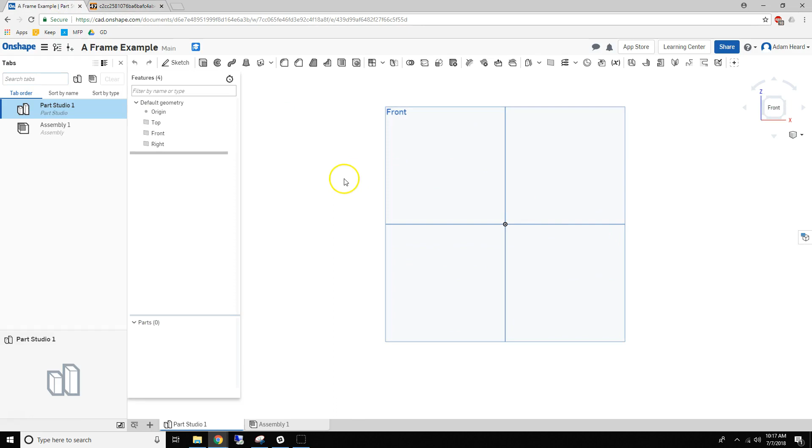973 is switching to Onshape, and I haven't done it all that much yet, so I'm going to be a little slow. But let's get started.

So I'm going to draw the side rails, edge on. Oh, and I should have made those construction geometry. There's no collinear mate, so you got to do coincident here, which is kind of a bummer. Draw that.

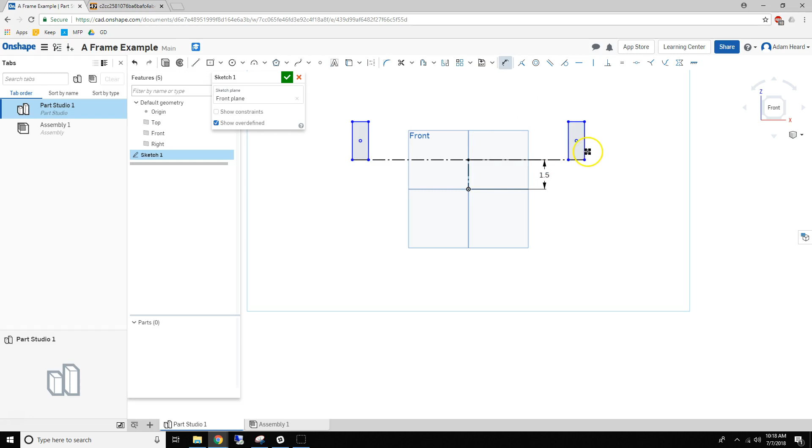Make that vertical. I think we had about 1.5 inches ground clearance. That's accurate enough for now. This was 32.5. These guys were 1 inch by 2 inch, and make that all construction geometry.

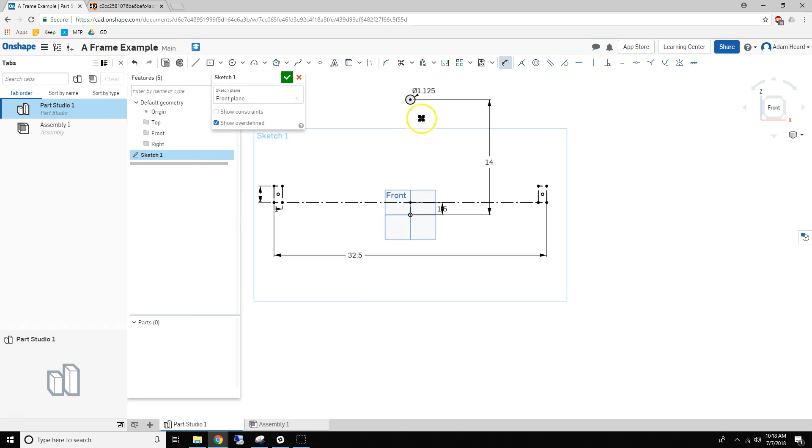Alright, so we're going to want a centered bearing hole for an FR8 bearing. Make that vertical, and we'll do that, I don't know, 14 inches off the ground for now or something. That's a number that we would come back in and iterate if we were trying to size what the arm's going to be. I've got no idea what that'll be right now.

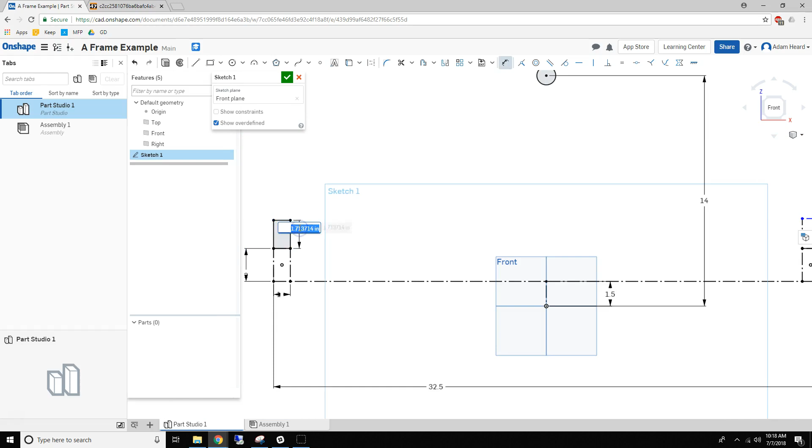So these are both going to be vertical pieces of 2 by 1. I guess I don't need to draw the one over here. To give us some holes to then attach to an angled piece of 2 by 1 to make the A-frame, and you'll see that coming up.

Alright, so as far as I can tell, Onshape doesn't have an angled rectangle tool, so you got to draw those manually, which is kind of a bummer. But with hotkeys and stuff, it's not too bad. Oh, there's no perpendicular hotkey.

I guess we can go equal, equal, equal, equal. Then we just got to do one perpendicular. Cool. And this is 2 inches. I guess we could have made it equal to this tube here because they're both 2 by 1.

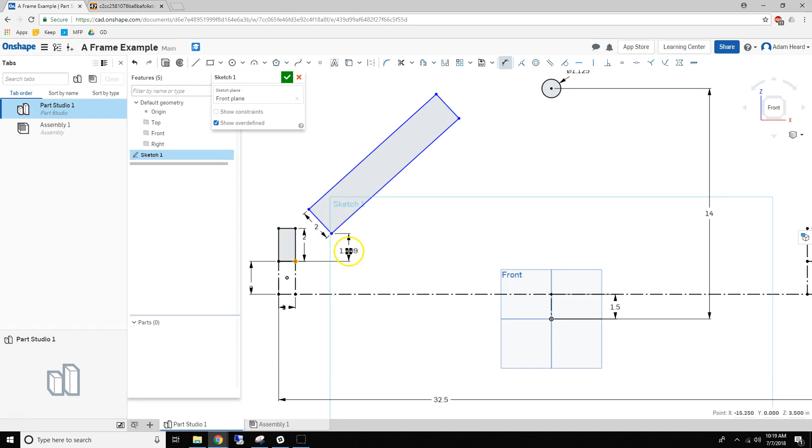I don't know. We'll dimension this 0.5 up or something. And dimension this like 0.1. Just something to get it close.

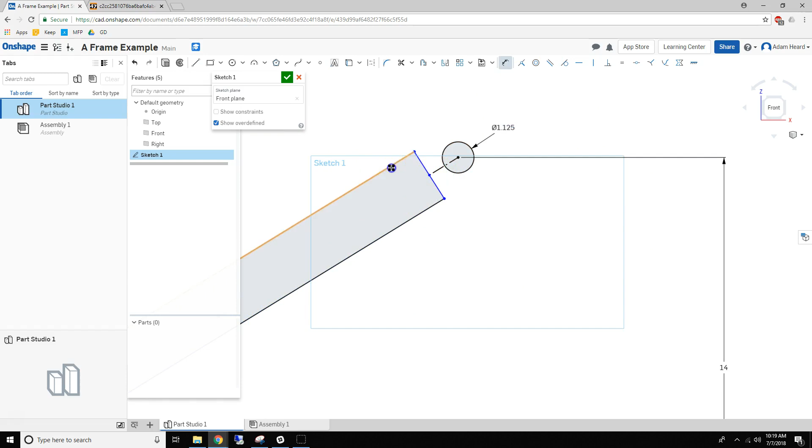We want the bearing hole centered on the tube, and we will dimension this length because for us at least we like having that be a clean multiple to make the cutting out a pre-drill easier, and then we'll dimension this as a driven dimension. So that's nominally a 1.5 inscribed circle, so that is enough room to fit the bearing in there easily, and you can just see that by the hole obviously.

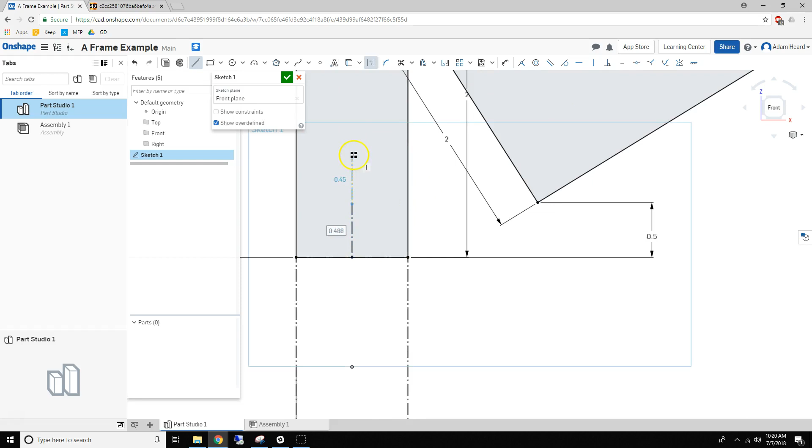What else do we need to draw in here? So let's give ourselves the holes. So we're going to just put our standard hole pattern on this. And I'm always torn when I'm just doing a couple holes. Do I use linear pattern for that, or do I just manually draw it?

I guess I did one more line there than I needed. So here's quick just to draw all 3, but there's definitely somewhere around 3 or 4 holes is where it makes sense to start patterning, I think.

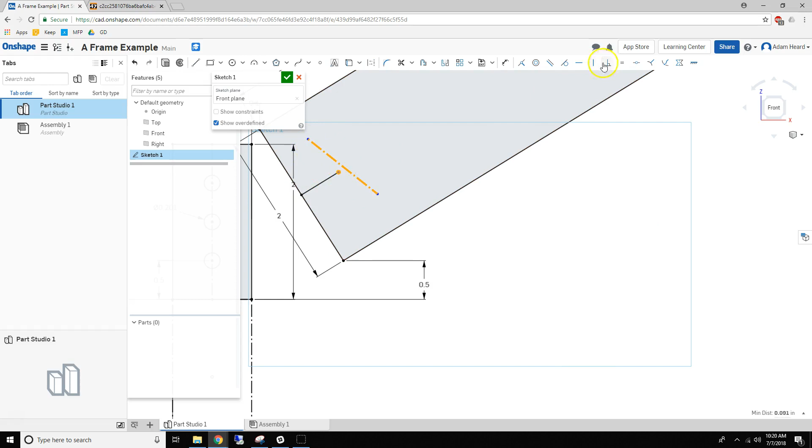We do our pattern a little funky here now. I'm still used to SolidWorks, so you can double click and lose that. Make this midpoint. Need to map some more hotkeys.

This will be 0.5. Make a construction. This will be 1.5.

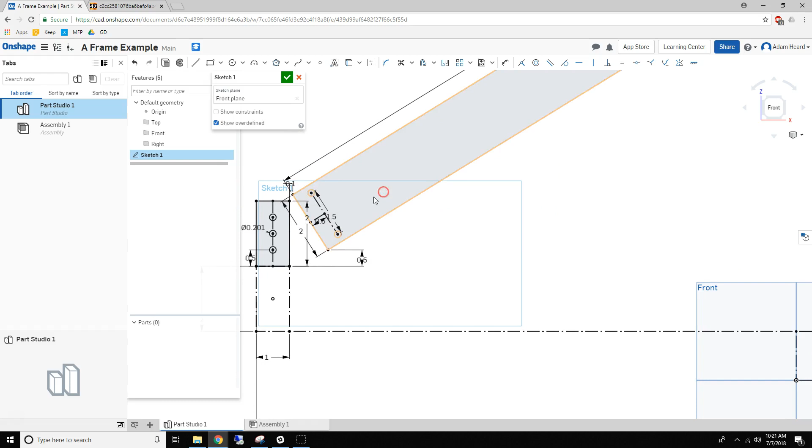And Onshape's not perfect yet, but it does have a lot of good stuff. There are a couple things you kind of got to hack. So if we want to do a linear sketch pattern, and someone please correct me if I'm wrong, as far as I know, we can only push this horizontal like you see here.

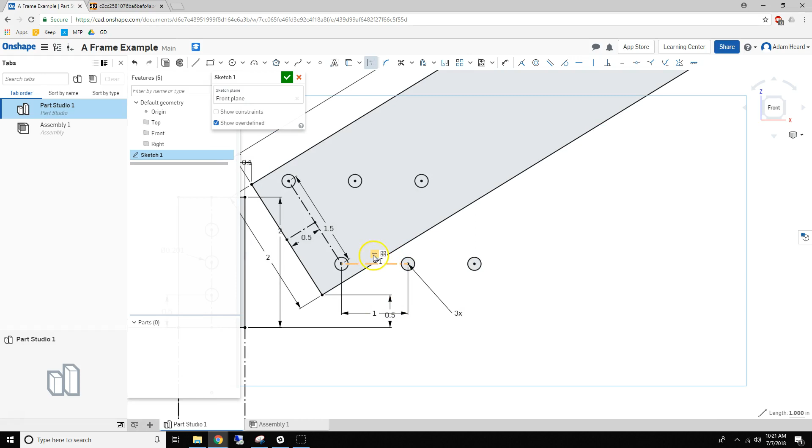But if you accept it, which for some reason exits you out of the sketch, you can then come in and delete, oh, not that equal, this horizontal there to let you then move this up. And we can change this to 0.5, make that parallel, and then we'll just iterate this number.

And you could use an equation to more intelligently do this, but I'm just going to guess and check. Oh, wow. Got that right the first time.

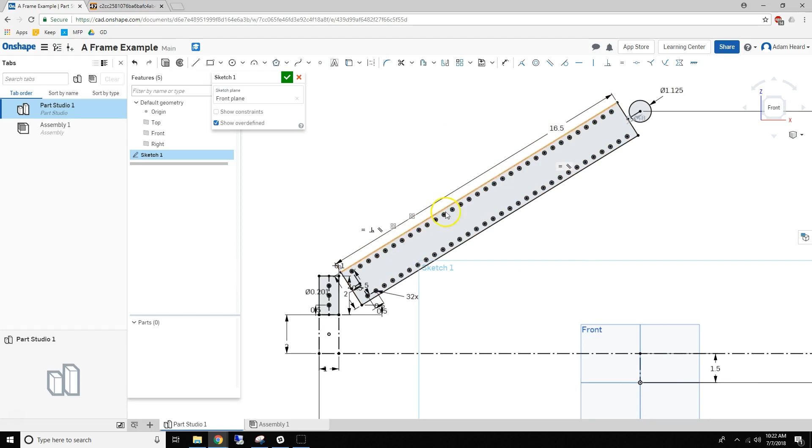All right, so we got our tubes. I guess we should make that construction geometry. Got our tubes, and we can extrude both the tubes. Oh, you know what, actually?

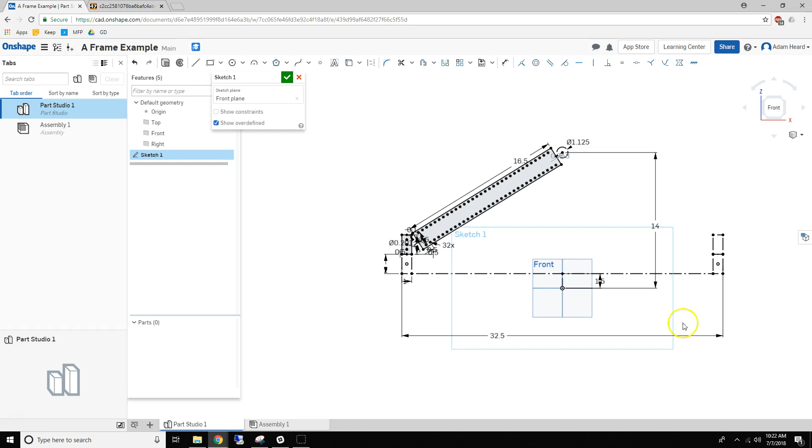I would like to use this Part Studio to set all of the dimensions, including the width between the two things, the two half A-frames, versus having that be a linear pattern or manually dimensioned later in the assembly and kind of hiding those dimensions apart. I'd like to be able to come in and change this 14, and then the width between this and the other one that you can't see that would be parallel to it, the width between these two guys.

So I'm going to change this a little bit. So I'm going to finish this sketch. I'm going to go back above the sketch, and I'm going to insert reference geometry, or plane they call it.

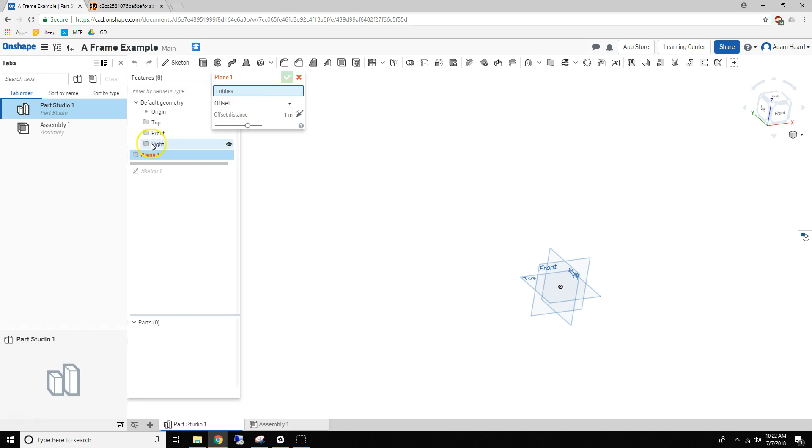I'm going to do that offset from the front plane, that sketch we drew it on, and we'll do that at 3 inches for now. And this is kind of a hack because Onshape doesn't have a full set of assembly mirror tools yet, which is really what you'd want here.

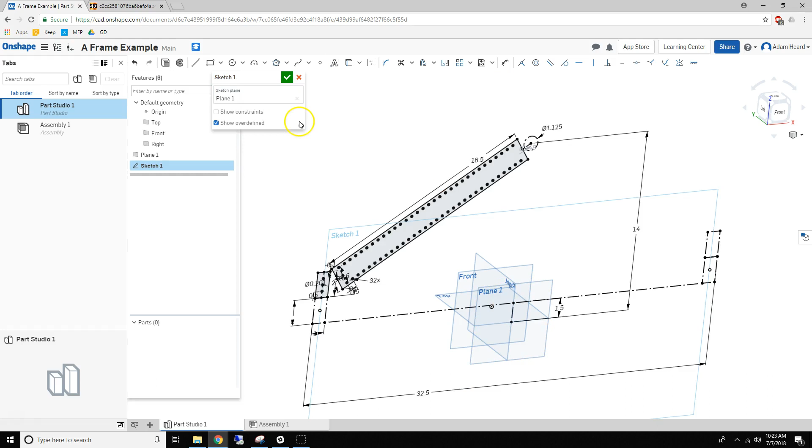So I'm going to edit this sketch. And it's my understanding they're adding those from reading forum posts, but we will make do with this for now. So now that sketch should be on that plane. Yeah, cool. We can extrude these guys 1 inch. This guy will be our vertical tube.

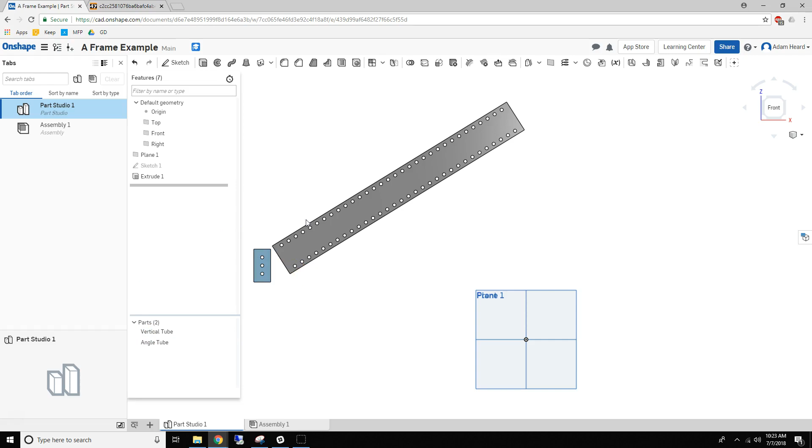What's a bummer is they do have a full set of mirror tools at the Part Studio level, but then it creates them as unique parts, and you'll have 4 parts that are the same in reality that you really want to show up as quantity 4 on the bill of materials, but instead it shows up 4 times, which is really not what you want.

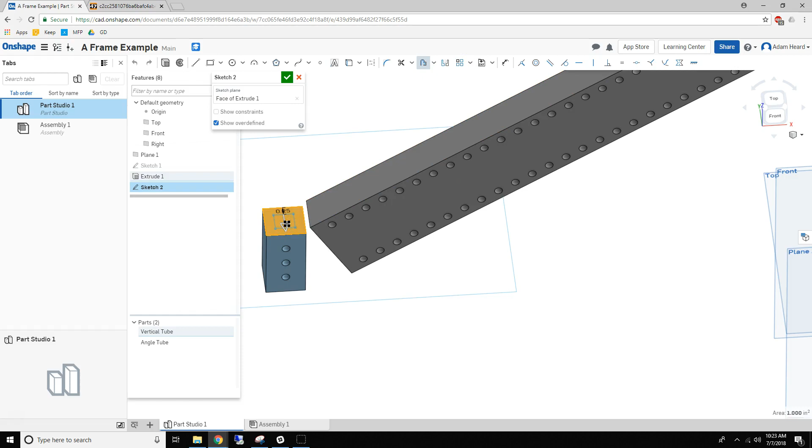So then we'll come in here, and this is where I kind of don't know what I'm doing yet. So I think there's an offset tool. Okay, so 0.125, we'll make that guy a little beefy. And then we'll extrude that. We'll want to do a remove through all.

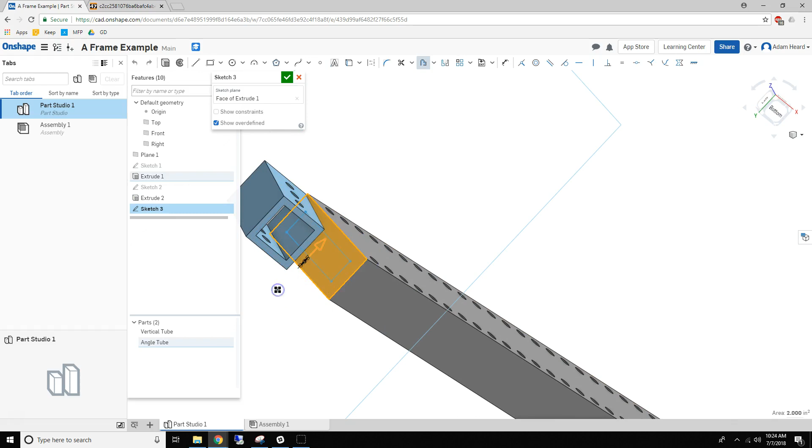Then we'll do the same thing here. Sketch, offset. We want to change the direction of that offset. Accept it. We'll do 16th wall here. Extrude, remove, through all. Alright, so we got our 2 tubes now.

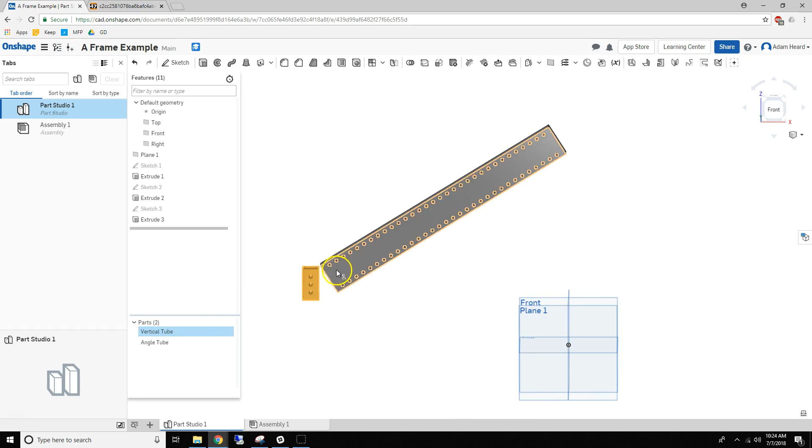We'll come back and do material properties later once everything is set. So let's draw our gussets. We're going to have a gusset down here.

How do I want to do this? I don't know if it's just me or if it's just not a feature, but you can't mouse over and click like you can in SolidWorks. I'm pretty sure that's just something I have turned off and I got to figure out.

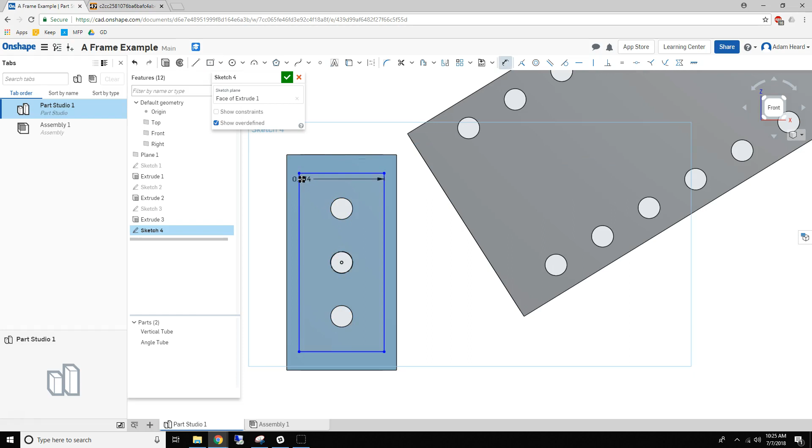So I'll do center rectangle. I don't know, I'll make that. We don't go to the edge because you just want to avoid any possible interference issues from tolerance stack up or any of that kind of thing.

Oh, you know what? I didn't want to make that hole. Construction, obviously I want that hole. So he's back solid.

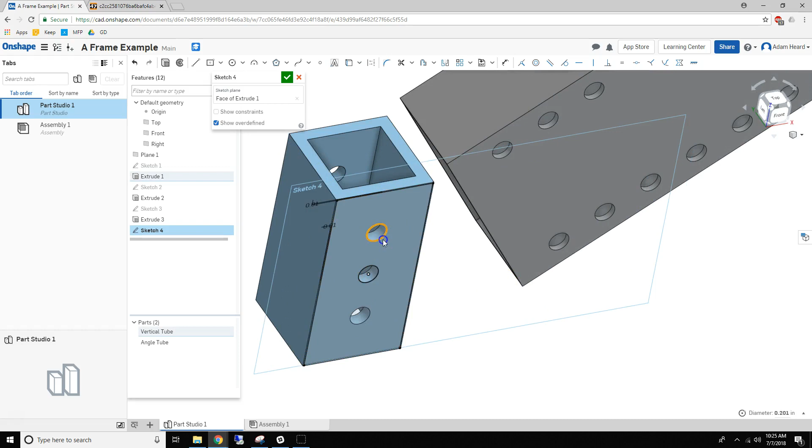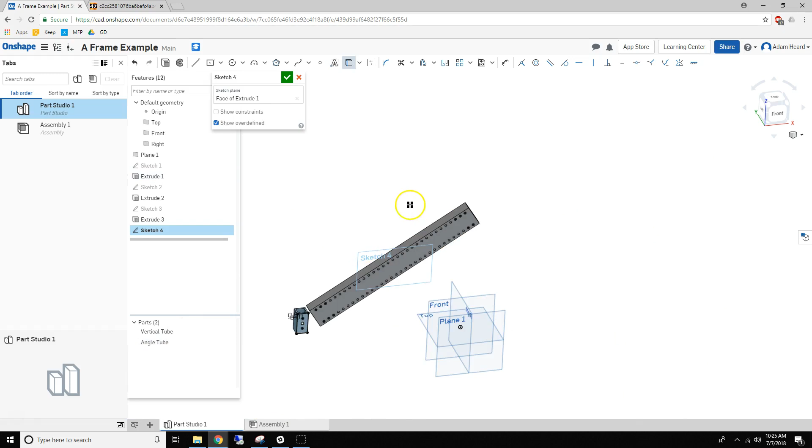The Onshape equivalent of SolidWorks convert entities is 'use'. We'll come up and we'll add these guys here while we're here. I guess I actually could have selected all of them and hit U once, and that would have been faster, but still learning.

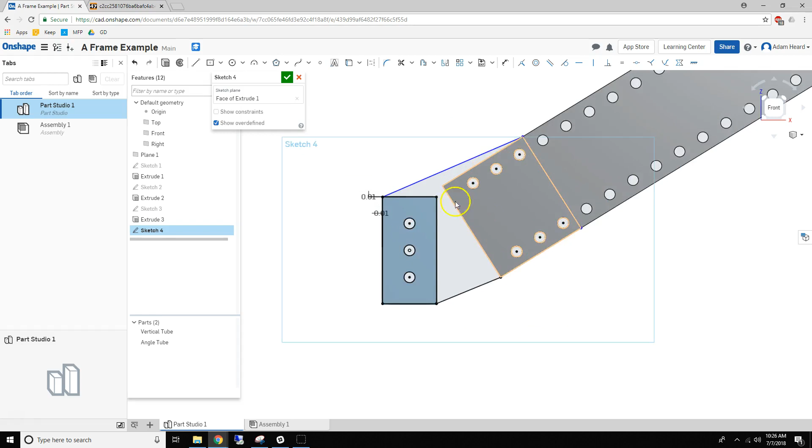Let's do that. No, it's kind of a funky gusset. I'm not stressing about making optimally clean gussets here. I'm mostly trying to show the Onshape workflow, but I definitely wouldn't draw them as kind of ugly as you're seeing them here.

Dimension these. Oh, I want to dimension to the center. The other thing that bugs me, and I'm sure it's something you can toggle, is when you dimension to a hole, it gives you that minimum dimension. It doesn't give you the center dimension. Ooh, trimming those breaks it, so let's not do that.

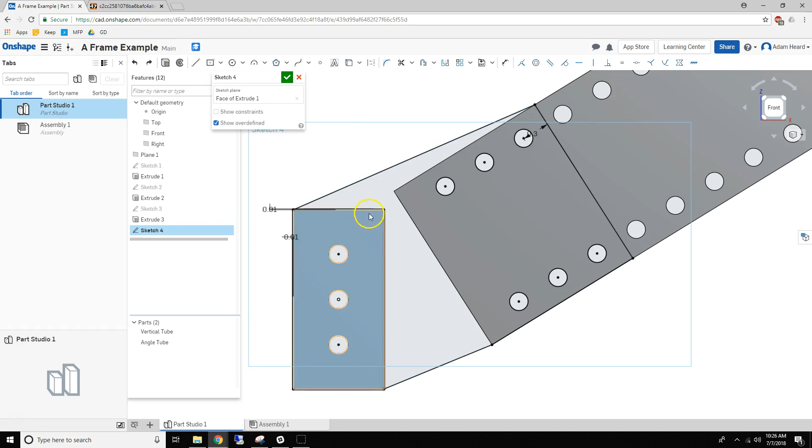We'll just make this construction. Okay, so that gusset down there is good, and we should be able to, in the same feature here, get this upper gusset.

Really should have drawn this the other way around the loop. I want that to be vertical. That to be vertical.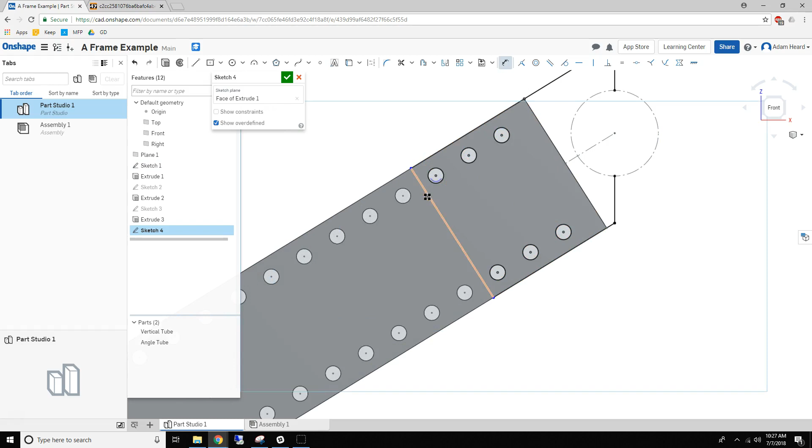Coincident. Coincident. Why is this? Oh, there we go, snap 2. Make that 0.3. Then we need to give ourselves a vertical center line to mirror about.

And we will mirror that line. We're going to, oh, I guess I don't want to mirror that guy, but too late, I already clicked him. And then give ourselves these holes.

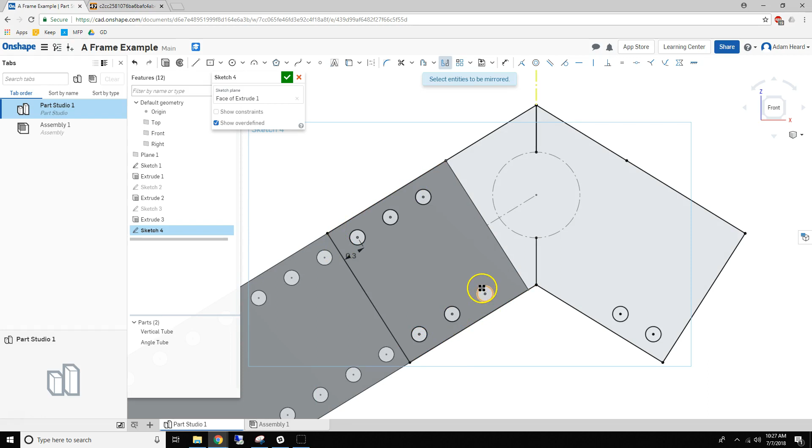Then see if it lets us use that. Cool, it does, but then we need to make it not construction geometry. We'll make that construction geometry, so it's all one part.

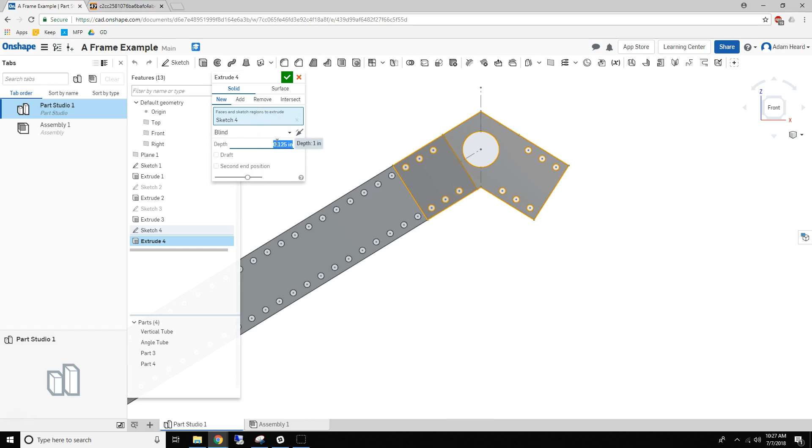Now we should be able to extrude both of these, and we want them to be new. And we'll have them be 1/8 inch gussets, pretty beefy. It's cool, we got 2 more parts down here, so we'll rename that. Lower gusset.

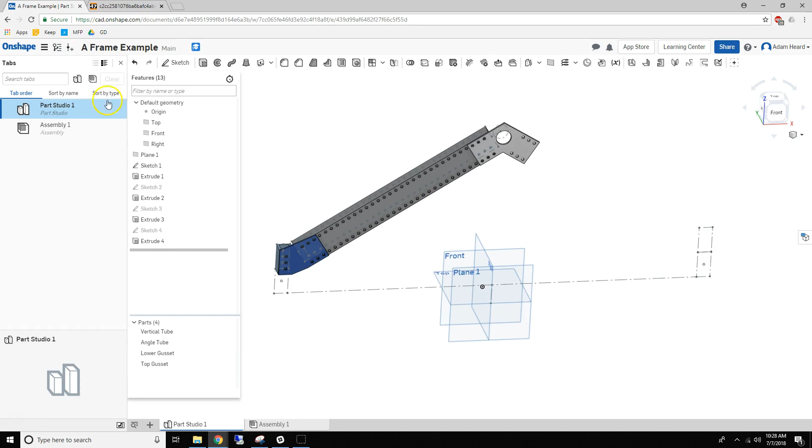Alright, we can hide this for sketch. Ooh, what sketch is showing there? That's weird, I thought I just hid that. No, I hid the plane. I hid the sketch. There we go. So now we could take this to an assembly and start assembling anything.

Oh, actually, first let's put some fillets in there. Which is F, maybe? Maybe not. Shift F.

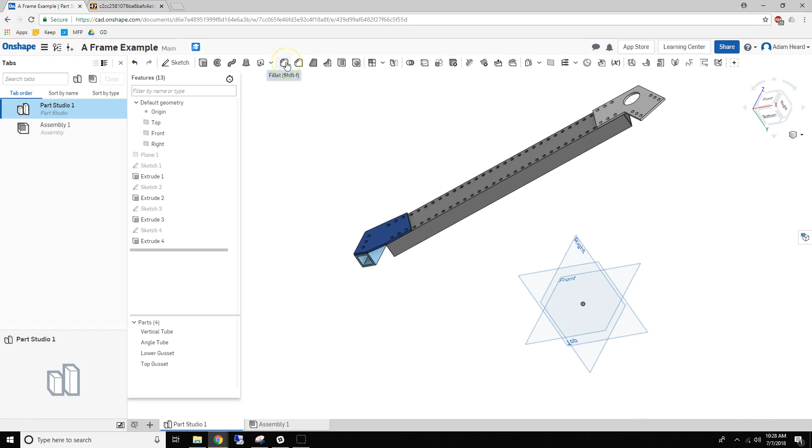Oh, and yeah, it doesn't have the power select that SolidWorks does, which is kind of a bummer, but I think overall the pros of using Onshape outweigh the cons, it just takes a little more time to work on things.

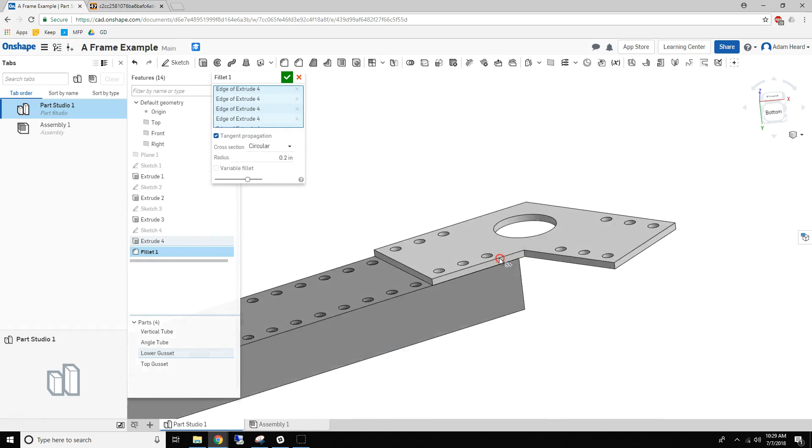I'm not stressing about picking optimal size fillets here. Like, we definitely do a bigger fillet here and there, look a little better, be a little more efficient, but just trying to show the Onshape workflow. Cool. Alright, so that's done.

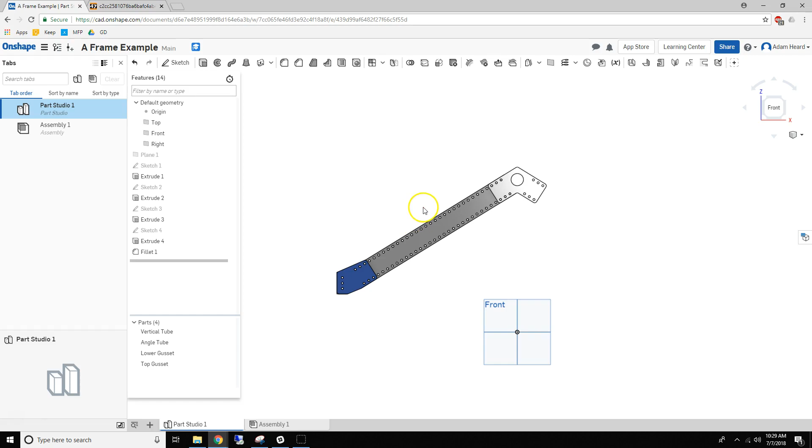So because I want to control the spacing of everything from the beginning, I'm going to kind of hack in some features. What I'm really doing is adding reference axes for the assembly level, because Onshape doesn't actually have assembly planes or axes or any of that yet. I'm sure they're adding it eventually, but for now we're going to hack that in.

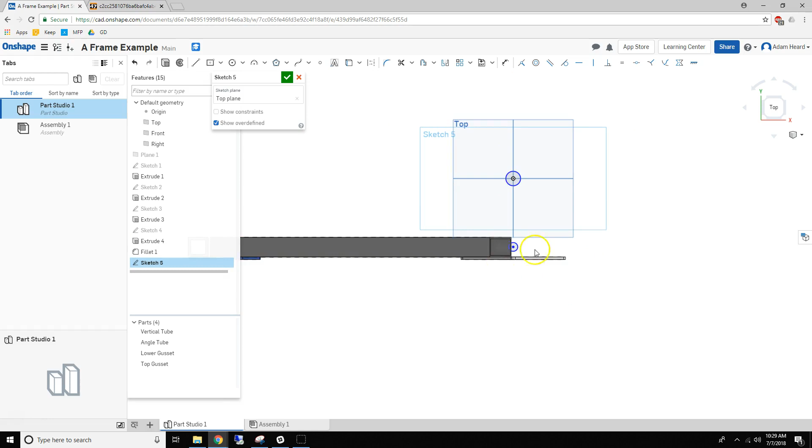I don't think this is too much of a hack, and it makes sense. So I'm going to add one there. I'm going to add one there. And what I'm doing is this one up here is going to be the center of both A-frames, and this one here is going to be the center line of the tube.

I'll make these small, like 0.1 diameter, so their mass will be kind of negligible, but we could also make sure to set a material that has pretty negligible mass. I'm using this construction geometry to get these guys horizontal. Okay, so he's located, and then he just needs to be the same size, equal.

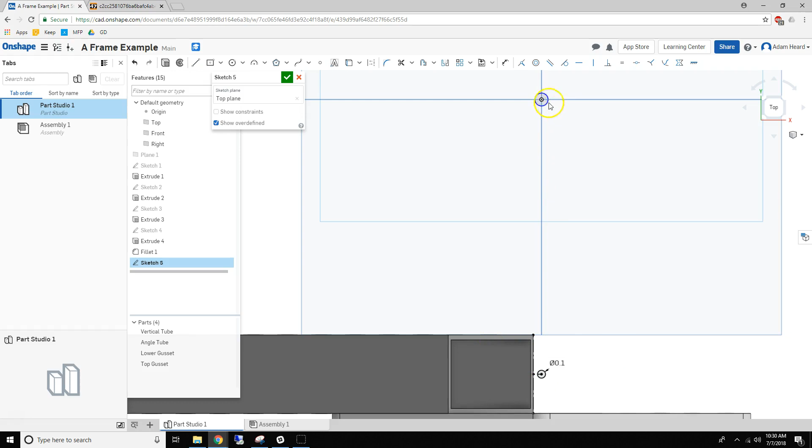So let's extrude these, new, 1 inch, and let's name these. Rename this, this is the center axis, and this is like the tube axis.

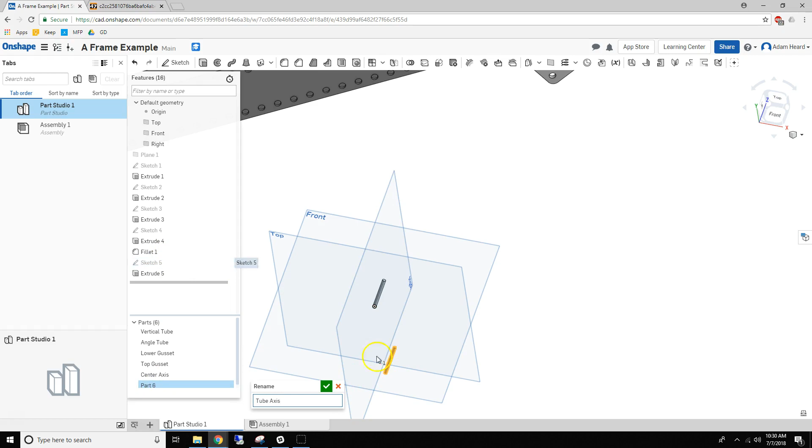All right, I'm going to come in and set materials for these. Material set, and now we are going to jump to our assembly.

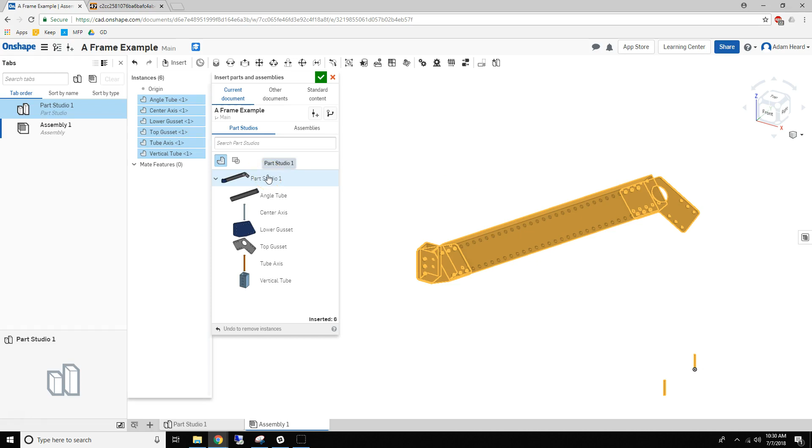We're going to insert the whole Part Studio, and if you don't click anywhere, it'll put the Part Studio on the origin as you see down there. So we insert that, and we're going to fix our first part, something SolidWorks does by default but you have to do manually here. We're going to select everything and group it, which is this guy. So now everything is fully constrained.

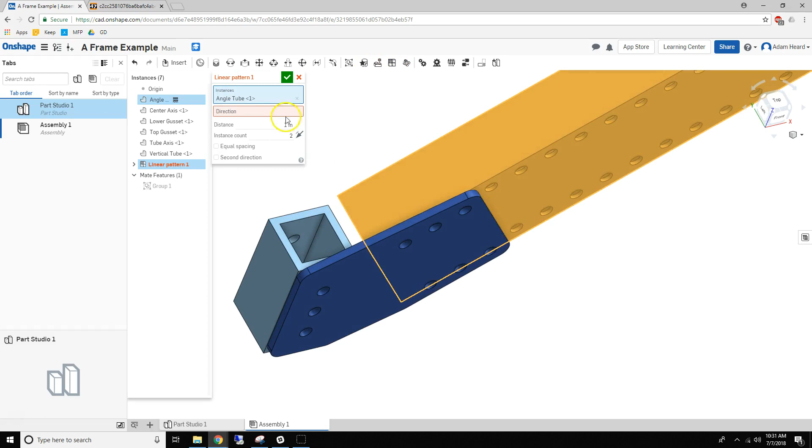Now we're going to start moving our stuff in. Some of this we can get with a linear pattern, and it's not too bad. This isn't the most robust way to do it, because if we change the gusset thickness or the tube thickness, this will break. But I don't think either of those will change that much. So now we pattern it the tube thickness plus the gusset thickness, and that'll get us that.

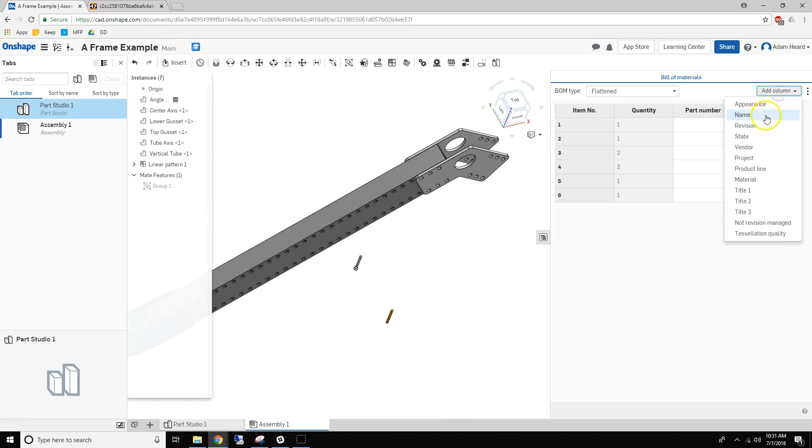And these are properly modeled. So if we open up the bill of materials, you can see that we have quantity 2 of these gussets versus separate line items, which is nice.

I'm really excited about using bill of materials a lot more, since Onshape opens really cleanly on the phone, so we can have a lot more kids in shop on the robot, on their phone or tablet, really looking at assemblies.

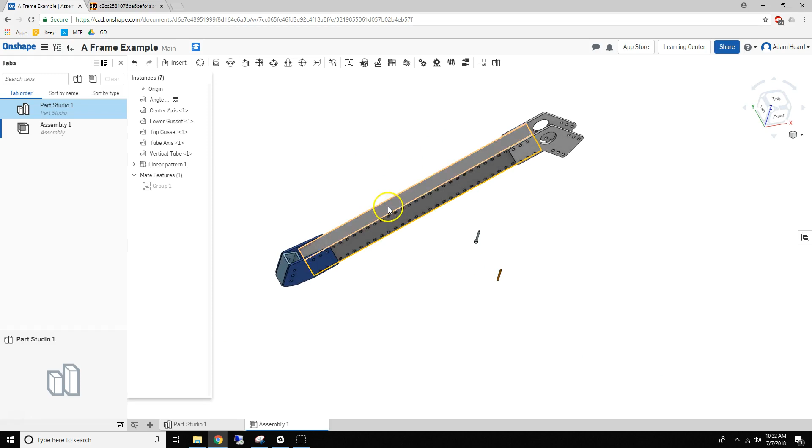All right, so the next step is we're going to take advantage of the fact that these parts are symmetrical, and mirror about this right plane here by revolving around that. That's a little hacky. Hopefully by season they just have these features implemented, but if not, we can do this. Set that to 180. Cool.

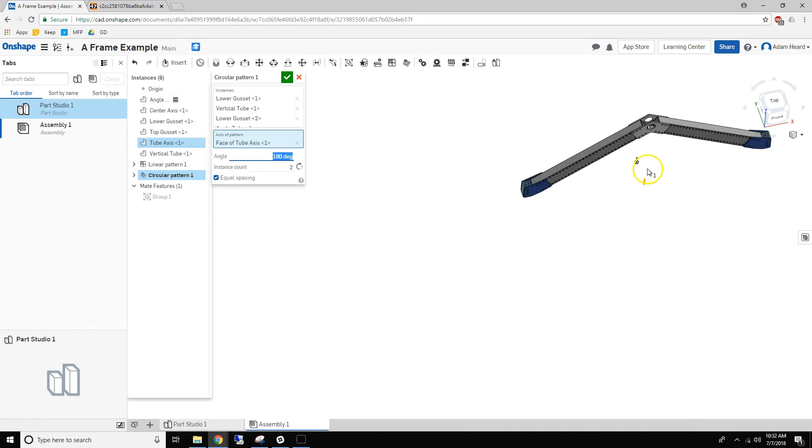That worked, and now we're going to do that same thing again around that center axis. Really, I think the takeaway here is those parts that we're adding in the Part Studio that are redundant, that we, I forgot if we excluded them from the BOM or not. I'll have to go back and check that. Those are assembly

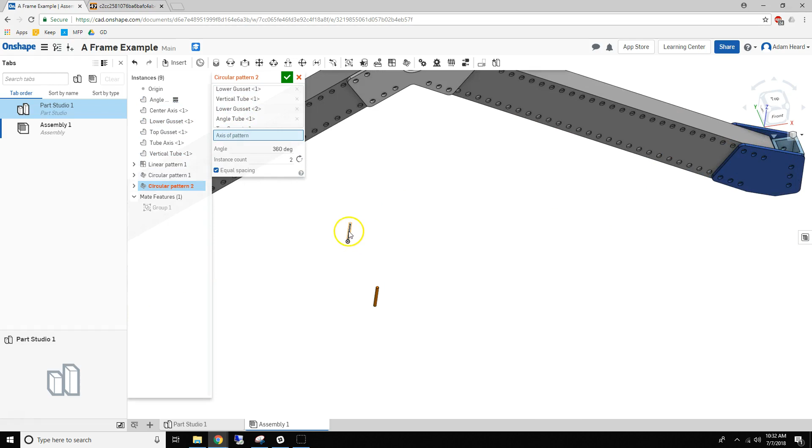reference axes. So now we can see the origin is there. So we have an origin that is on the floor of the robot, which is something that I really like for top level assemblies like this, and is centered on, is it the medial plane and then the anterior posterior plane? I might have those names wrong.

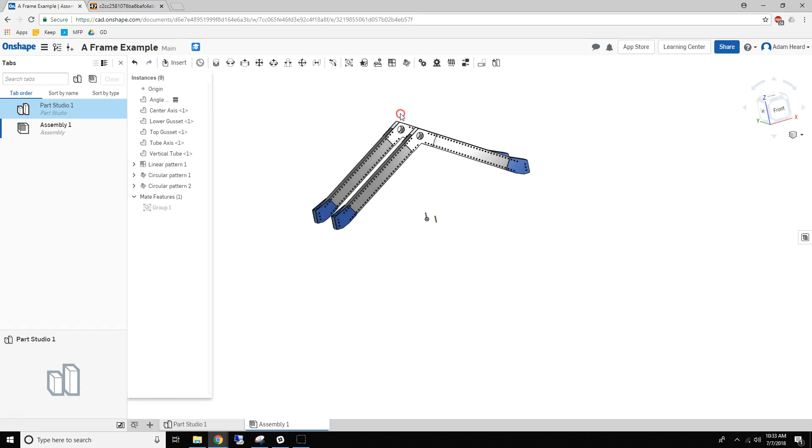And if we come in and look at our bill of materials, okay cool, so we did not exclude those axes. So I'll go and show that, and you can see proper quantities for all these.

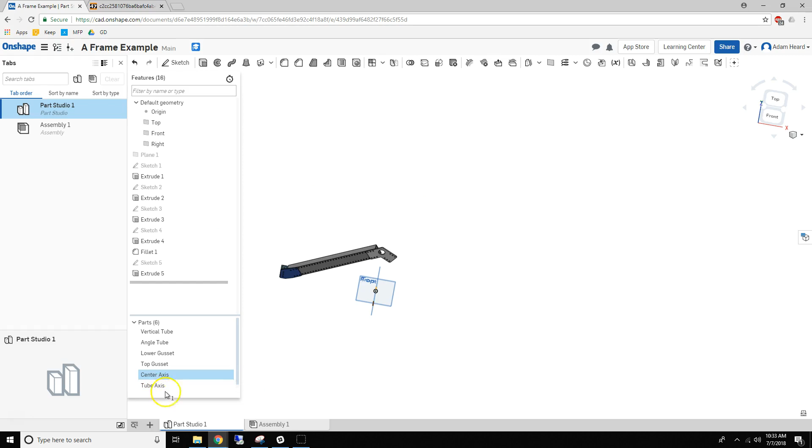And if we open up the top level robot bill of materials, once this is put in something, we'll be able to see how many gussets we need to make. So cool trick, we can come in and select both of these at once, go to properties, come down and hit exclude from bill of materials. We could fudge the mass too, but their mass is so small that it's really not a big deal. Now we can see that they are not in the bill of materials.

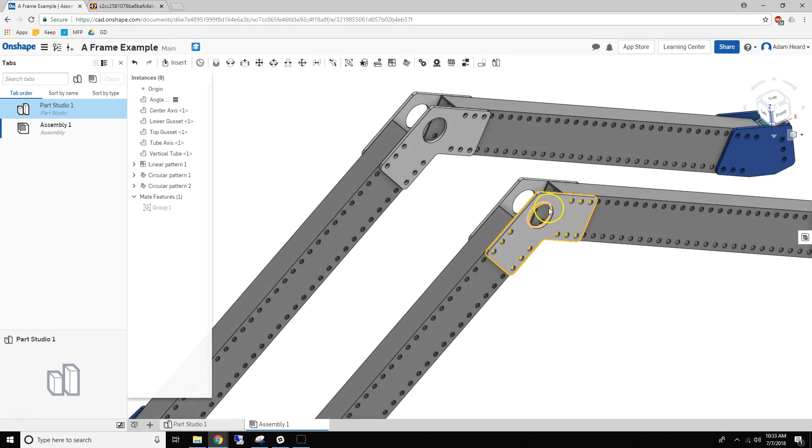So we don't have a library yet to do bearings or any of that setup. We do have a couple fun parts in though, so I'll drop in one just to show the shaft. Measure that, it's 8.25. We're going to add another 1/8 inch, so 8.375, because we know we're going to have those bearing flanges. Then we'll round that up to like 8.39. Let's call it 8.4 to account for tolerance stack up.

So now we're going to come into our very minimal library, our VEX shaft. We have a pretty cool one. We're going to do an 8.4 inch functional length. It's going to be a 1/2 inch shaft, tube axle. We're going to have snap ring ends. We're going to generate that.

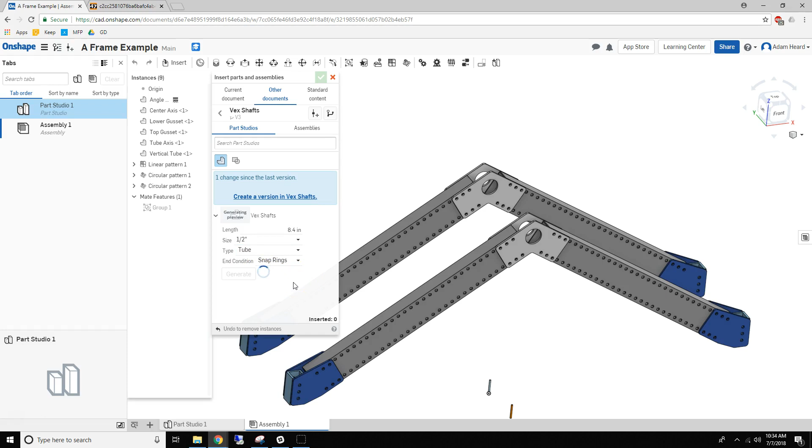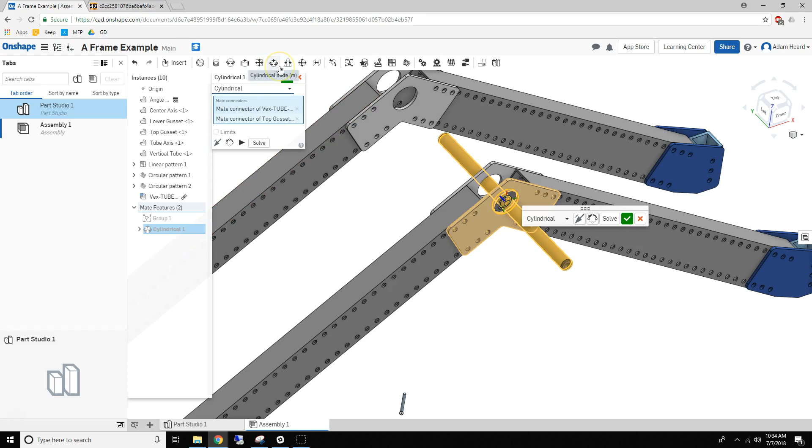Put that there. Now, since I don't actually know Onshape all that well yet, I don't know the best way to make this symmetrical in there. So we can start by doing not a fasten mate, we want to do a cylindrical, I think, and that should let us move this left to right. Yeah, so I'll just leave this there for now.

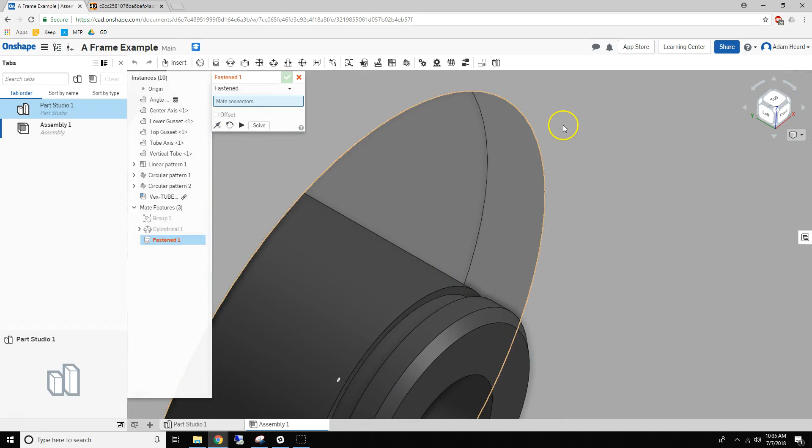And my philosophy is this is mated by its primary plane, so that's how we do almost everything in Onshape. So if we come in and change dimensions and stuff, we don't have to remate anything. I don't like mating by doing the dimension from here to there, that sort of thing, though it wouldn't be the end of the world to do so.